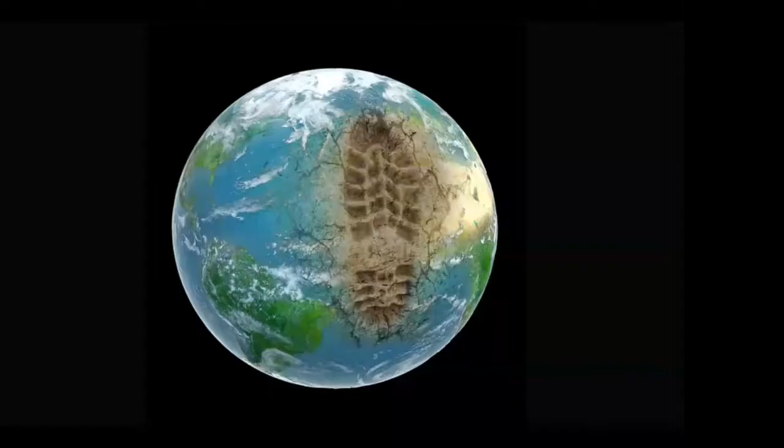I like to start off, since I'm talking to 90% students, about how I even got here. My study was really in water resources. I started at the University of Colorado Boulder and literally got a degree in water. It was very innovative at the time. We did basically everything in policy, hydrology, and social justice issues.

It really pointed a lot to our footprint on this planet growing more and more intrusive, impacting not just the lives of each other, but negatively impacting all the ecological systems around us. So I got very depressed, but I was hoping there would be a solution I could latch onto and move forward with in my career.

In my final semester, I got that opportunity. I started learning about the concepts of bio and phytoremediation. Raise your hand if you've heard of those two concepts—okay, about half the room. Basically, bio means life and phyto means plant, and remediation stems from the word remedy, like taking a remedy to heal yourself. So it's life and plants remedying, in a sense, the planet.

At Boulder, our next door neighbor was Rocky Flats, which at the time was producing radioactive rods for a variety of weapons and nuclear power facilities. Throughout that period, they had really high uranium levels that were radioactive in parts of the area. I started reading papers about researchers out there planting sunflowers, and these plants were doing phytoremediation—they were actually breaking down the higher state of uranium and making that radioactive material benign.

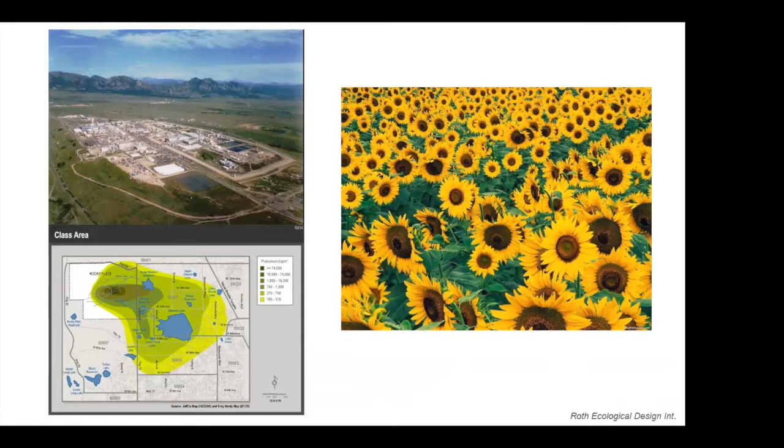This led me to a man named Dr. John Todd, based out of the Northeast in Vermont. He was definitely an ecopreneur, with a bunch of different patents on a variety of ecological technologies. One of his most famous was what was called the living machine.

This took those concepts of bio and phytoremediation and put them in an aquatic format—basically wetlands in a box—able to treat a whole variety of polluted water. This is actually the wastewater treatment plant facility in Burlington, Vermont, for example.

So instead of it being this stinky, odorous place you may never want to visit, this was actually a place where people would come and have lunch, pick flowers, take them to the farmers market. It was really a paradigm shift for me.

I had the opportunity to serve as his apprentice for about 6 months, and then onwards I worked for him and got shipped to Hawaii to deliver the technology to the state in 2000, under our late Senator Inouye. He earmarked a project, at the time through the biotechnology program at PICHTR, to bring the technology to the state and see if it could work in Hawaii, utilizing Hawaii's native plants, Polynesian introductory plants, and tropical plants.

So we ran a research facility—actually in a really glamorous spot, at a slaughterhouse out in Ewa Beach. You can imagine there was basically a big unlined pond where a lot of polluted water with a lot of nutrients was going into the groundwater, so it wasn't obviously a good thing.

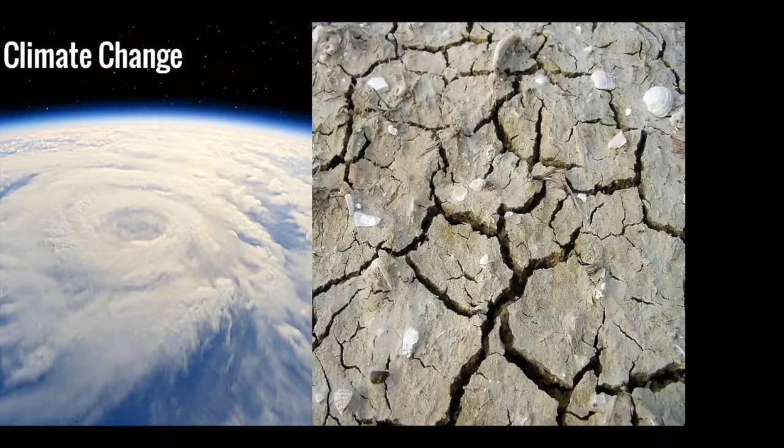So to start on the topic of thinking about the future and our water strategies, we cannot not think about climate change. In the news today, we've heard more and more about these hurricanes and growing storms. But on the other flip side, we're also dealing with increasing issues of drought, not just here in Hawaii, but globally. And with the storms, obviously we remember Irma.

Folks on the East Coast are still dealing with it. It was being claimed as the strongest hurricane ever. With climate change and the warming of the oceans, this is how these storms can get larger than usual. And of course, Maria just hit last night - 915 millibars this morning, the lowest millibars recorded ever, with Maria.

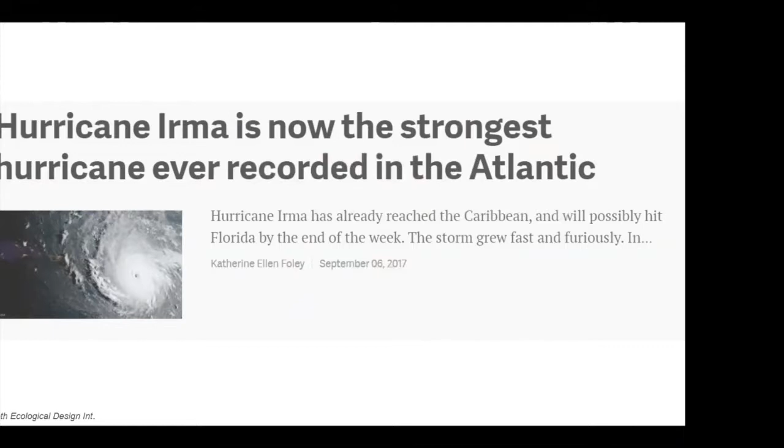We're obviously living in a world where these things are becoming more regular, becoming larger. And let's not forget Harvey. I pulled up some statistics from Harvey, because it's actually a really interesting case - these are types of cities that don't usually see this, an unusual event of a hurricane or large storm coming in. Granted, they are becoming bigger and a little more ferocious, but the question becomes: was Houston prepared? Did Houston think about its development over the last 20 years, knowing they're going to get hurricanes, to be really prepared for when Harvey came?

So we're going to run through it really quick, but just some statistics. 51 inches falling, that's 11 trillion gallons of water hitting the city. You can see 56,000 911 calls, and about 450,000 residents asking FEMA for assistance. One of the main issues here was that FEMA had drawn the lines for folks to have flood insurance, but many of the folks were actually outside of the FEMA flood insurance lines, meaning they didn't have any flood insurance.

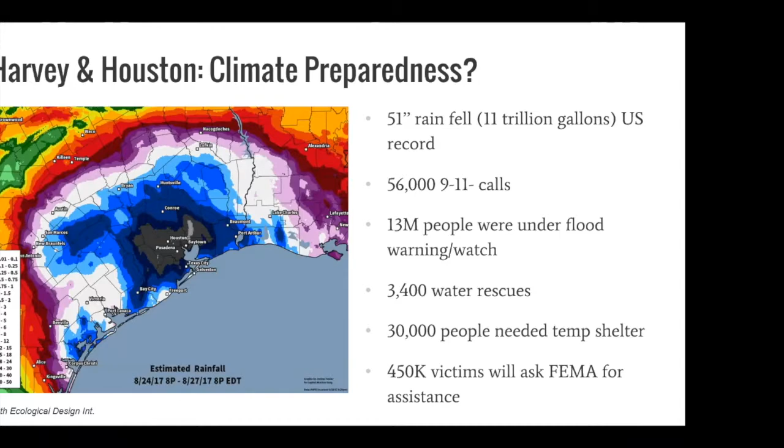This is definitely a huge deal because FEMA on average doesn't give any more than about $5,000 to $30,000 per resident. So this is, in my opinion, something the city should have maybe thought about before these kinds of storms hit.

Raise your hand if you think removing wetlands is a good idea. All right, so for everyone online, no one thinks that's a good idea. Raise your hand if you know about the Clean Water Act and the Wetlands Act, for example. Well, technically it's also illegal to remove wetlands.

Through the Clean Water Act and the Wetlands Act that came out of the 1970s, people really understood that wetlands were really important as an ecological service. They can store water, they can't prevent flooding, but they can hold more water than concrete can, right?

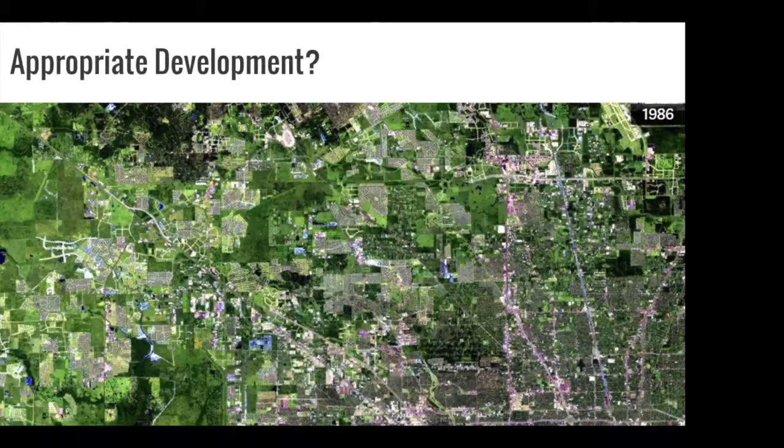So then we move to the year—oh, it's 2017, sorry—and you can see the big difference in impervious surfaces. So with 70% of the wetlands gone, they went out and sprawled the area.

And then, you know, this should just be obvious, but impervious surfaces plus the high groundwater and the storms is going to equal flooding. Has anyone ever seen, besides putting in pavers, concrete let water go through your driveway or sidewalk? No, it runs off, it runs down the road, right?

So although you cannot say that keeping all those green spaces wouldn't have caused an issue, it certainly would have reduced the amount of flooding damage that was caused. So in my opinion, Houston, no, they weren't ready and they weren't planning for these kinds of storms. And in many ways, can the city even be held negligent is a big question.

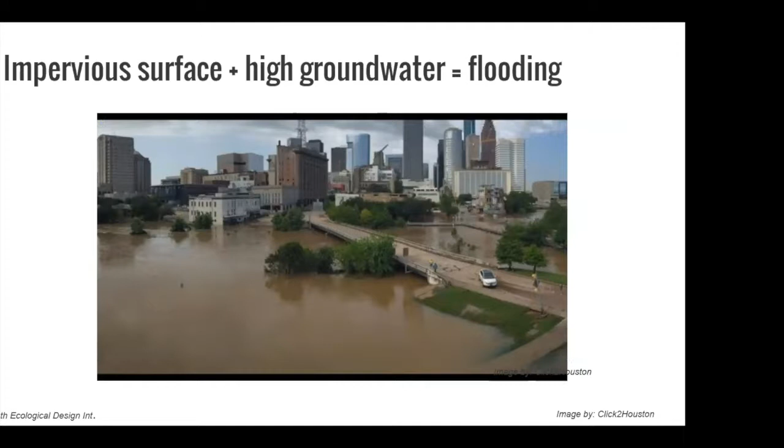But these are the kinds of issues that I think we as Hawaii need to think about when we start planning and developing our cities, because the reality is there's more people and there's going to be more development, but how can we be smarter about it?

So this is just an example to show that Hawaii still has the potential of getting one of these storms one day soon. Fortunately, we haven't had a really bad one since Iniki, and that was in 1992.

But you can see the track record of the different types of tropical storms, depressions, and hurricanes we've had, and we've been generally pretty lucky. Mostly we're thankful to the Big Island, which tends to divert storms away from us. But at the end of the day, it's not an if question, it is a when question, right?

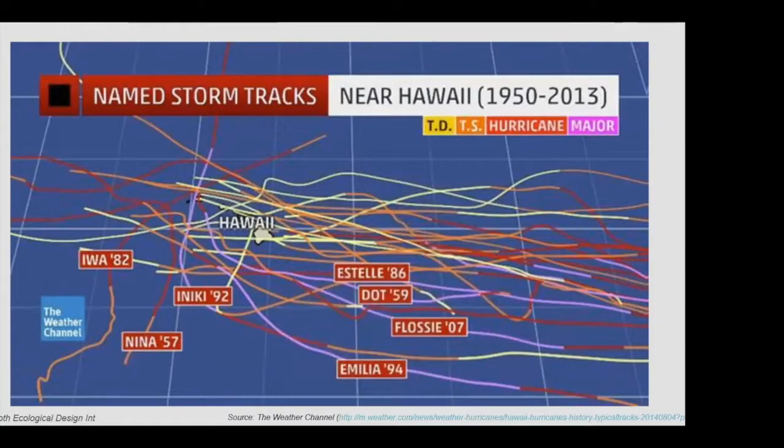And it wasn't that long ago that Darby hit, right? So this is just an image of what comes down the valley after some of these major storm events. We look at the city and we have a lot of flooding in the streets.

Here, this was an image of Waimea Bay afterwards. Obviously a huge amount of sediment coming down, and this also has water quality issues, of course, for our coral reefs and so forth.

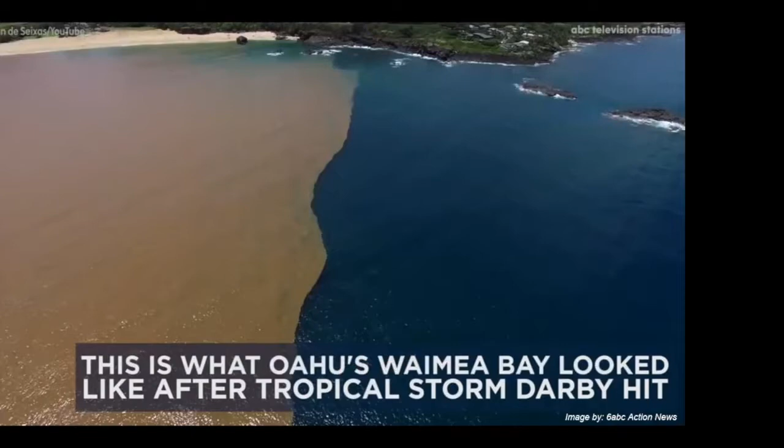But beyond just the big storms, in terms of hurricanes and tropical depressions and so forth, just our regular rain events are changing. This is actually a paper co-authored by my old office mate, Marcy Grabowski, over here when I was at SOEST. But basically this study found that the 20-year storm is actually becoming more frequent in an area.

This is over in Kona. But generally speaking, we're starting to see these heavier downpours, all of our rain maybe in one month coming down in a couple of events, instead of being that light trade wind pattern. So this is important too when we think about our planning and design.

Another big issue we have to consider is sea level rise, which is happening. This image, given to me by Chip Fletcher, shows the Ala Wai during a very high tide event, or king tide. You can see the water actually coming up through the storm drain, which usually moves water off the street into the canal. So if we had a king tide and then a heavy downpour, what do you think might happen here? This issue is certainly not going away.

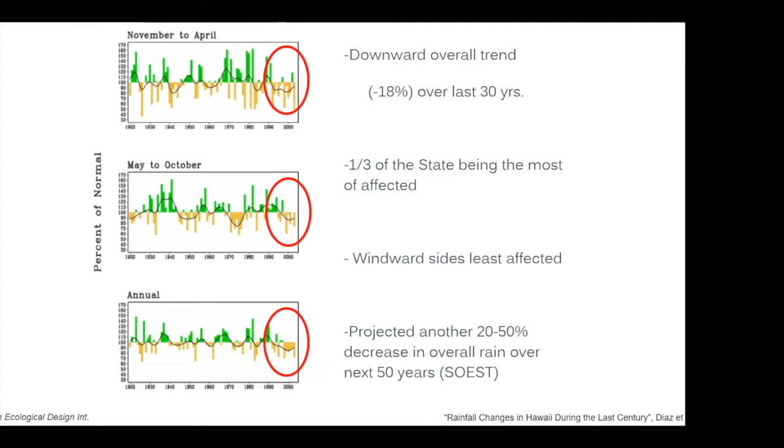On the total flip side of having too much water, we also have to deal with not having enough. Drought, unfortunately, is trending in Hawaii over the last 30 years or so. We've had a downward trend of rain, about 18%, according to UH scientists. And if you look at different projection models produced by SOEST, they show we might have as much as 50% total rain reduction in some of our leeward areas over the next 50 years.

On the flip side, with less water getting into our aquifers, we also have to think about the growing population. Right now, the spread of water usage in the state, according to the Hawaii Water Conservation Plan from 2013, shows about 60% of our total water is going to agriculture, and basically the rest is going to water usage in our cities. It's also important to note we could be looking at doubling the state's population over the next 60 to 100 years. So we really need to think about our water demands, where the water is going in these sectors, as we begin strategic water planning in the future.

This is the reality as it is right now, from the State of Hawaii Commission on Water Resource Management. This shows the different areas where we have groundwater supplies in the state. Not surprisingly, in areas with high population, shown here in red, we're basically pumping out the same volume of water that's going in—that's called sustainable yield, which isn't necessarily where you want to be. You want to be more in the green, where you have more supply, pumping out less than what's going in. So areas with higher population or drier conditions and high water use tend to pump out more than what's going in.

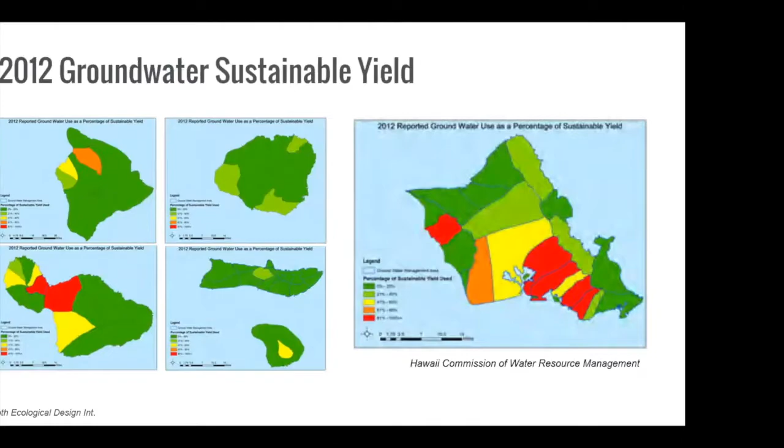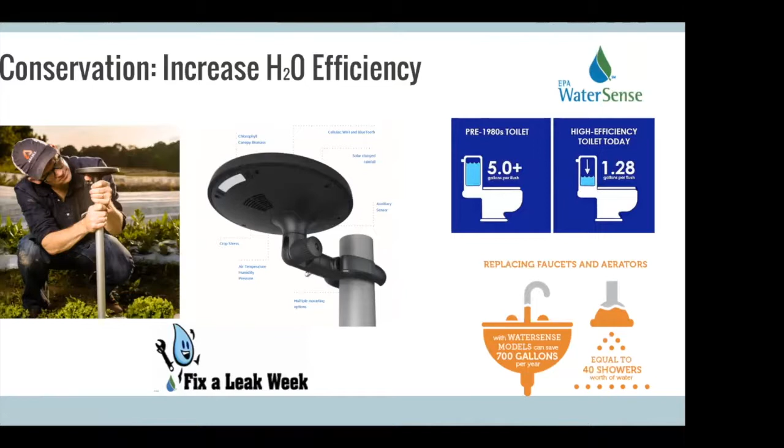It looks at the chlorophyll, the soil, and the plant health, and it'll irrigate just enough based off of satellite imaging, as well as through a company called Arable that creates these computer technologies to monitor plants. Interestingly, they're inexpensive. This one is about $1,000 and can cover about 1,000 acres, so it's an inexpensive way for a farmer to get on board.

Then the other two are recharge and reuse. The goal is increasing about 30 million gallons a day of stormwater getting into the ground instead of running off, and this would happen in more critical areas, especially where we have groundwater supplies we want to focus on. Then you have reuse, which is the recycled water we talked about at the beginning—doubling the volume of wastewater treatment used to produce recycled water to replace potable water needs by the year 2030.

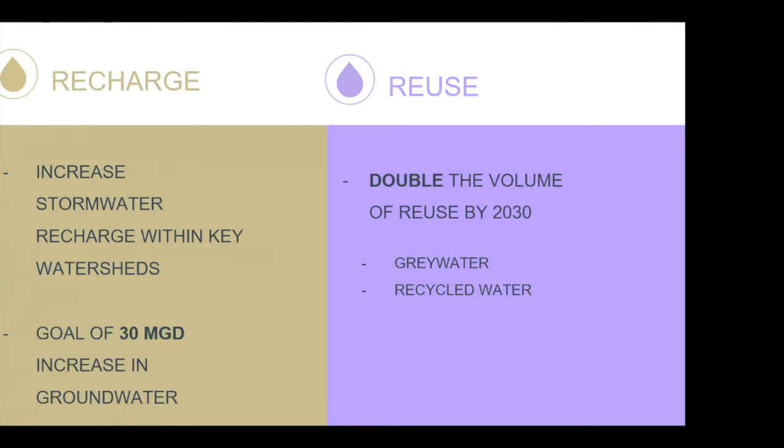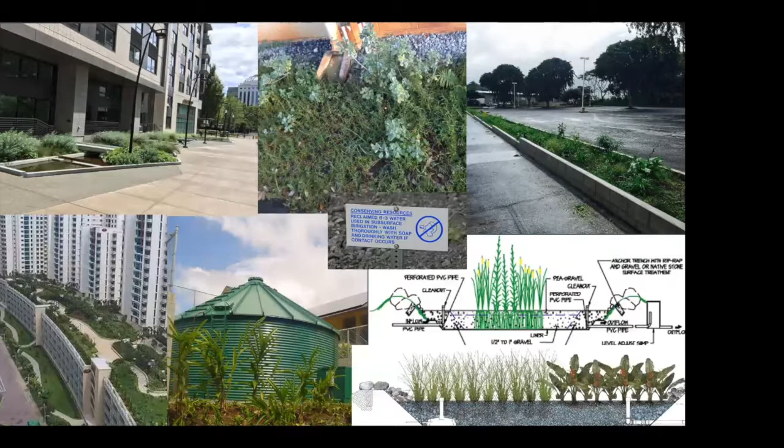In the built space there's a whole variety of approaches for how these can be brought in. Landscape features don't just have to be pretty things, they can be functional too. For example, this is a rainwater garden, again a project in Portland. On the far right-hand side, Windward Mall, that's what's called a bioretention—it takes all that stormwater from the parking lot and runs it through that sliver of terraced garden. Of course you have green roofs, and even rainwater catchment incorporates with green infrastructure, because really the whole concept is how do we mimic the natural cycles of water and nutrient management and put those ecological services into our communities.

So just to jump a little deeper into recharge, I'm going to throw out some things to make sure we're all on the same page. What do you guys think stormwater is? How is it defined? It's runoff after a rain event—basically once that raindrop comes down and hits a surface like a roof or a parking lot, that becomes stormwater. So it's no longer rainwater, it's now stormwater.

So then what is stormwater runoff? Any of that water that runs off of an impervious surface. At a certain point it doesn't even have to be an impervious surface—you can still get stormwater runoff in a green space, but in those green spaces there'll be a certain point of absorption where it cannot hold any more water in the soil or in that planted area, and that also can become runoff.

So why do we care? Let's think about what's in stormwater. This is actually from 2006, so I don't know the updated number, but if we talk about 95 streams being technically impaired in the state of Hawaii, that's a pretty big number. Every time stormwater runoff gets generated and isn't recharged as quickly as possible, it keeps gathering with its friends—you suddenly get a lot of water coming down a street, picking up all kinds of material, and all that material gets dumped into our streams first, and then ultimately into the ocean.

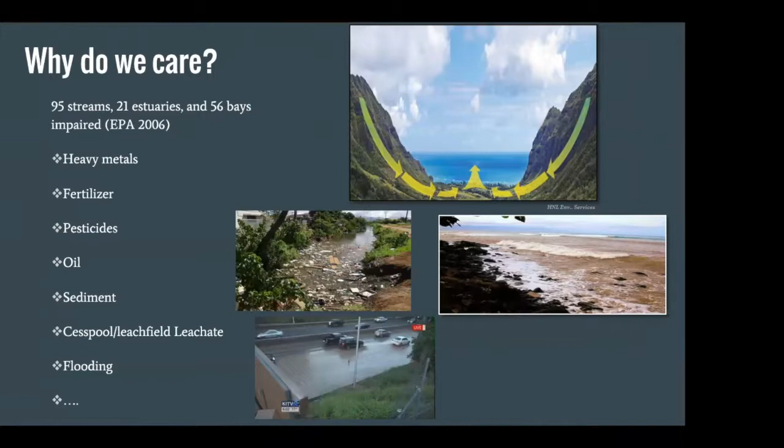So when we think about how we're going to do green infrastructure and how we want to think about design, the number one thing we first got to understand is rainfall, right? We have to understand, when you start looking into a site and thinking about how are we going to try to slow down that water and recharge it, we need to figure out how much water are we talking about.

Hawaii is one of these special places where we have probably the most diverse amount of rain per square mile in the country. But there's a lot of great resources for figuring out how much rain you have in any given space. One of my favorites was actually made by the University of Hawaii Department of Geography.

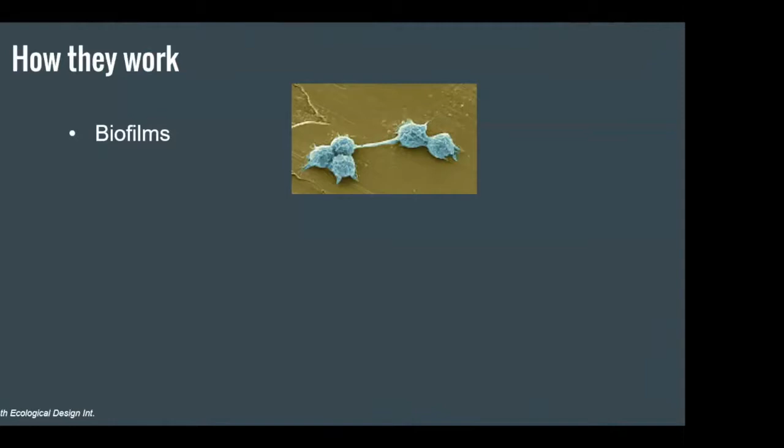I'm sure most folks have a bit of food web knowledge—it starts with the microbes. The microbes form biofilms and do a lot of digestion of sometimes the longer chain organic molecules. They need a place to attach, so the plant roots provide that habitat. The plant roots have a lot of surface area, similar to our intestines—if you were to roll out all of our intestines, it'd be miles and miles of surface area. It's sort of the same concept with the plant roots.

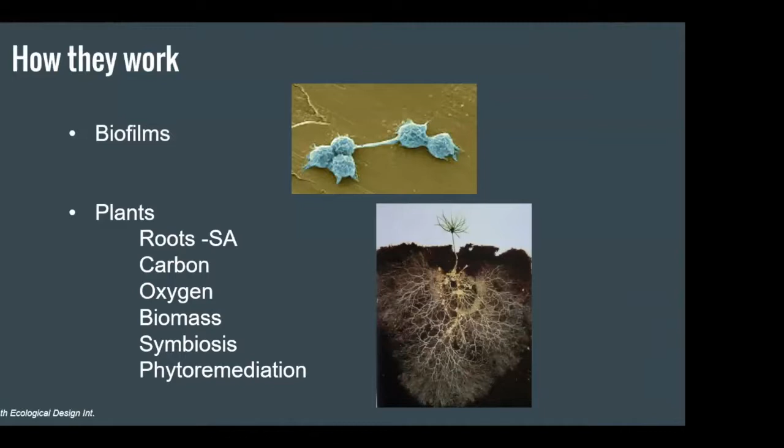The roots produce all these other functions that support those biofilms and microbial growth, and they take out maybe 5% of the nutrients or pollutants, but it's really providing the condominium complex for these biofilm communities. Depending on what the waste strength is coming in, you just need a certain period of time for it to sit and have retention time through the treatment system.

So just some examples of local projects. The new UH campus out in West Hawaii, called the Palamanui campus, is a LEED Platinum facility. This is actually during construction, so I unfortunately don't have a picture yet of how it looks today, but you can see you don't see the water on the surface—this will eventually just look like a garden. It's treating the water to secondary standards, and all the water will then be recycled and used on campus for irrigation.

Another one down the road was for Kaiser Permanente in Kona. Again, this is a wastewater treatment plant, but you wouldn't normally think of it—it's also growing heliconias and other things, where the operator comes out and cuts the flowers and leaves them out for the hospital staff.

So in summary, I'm going to pull all these things together, because this is really where I want to touch on how we bring all these little pieces together and start thinking about the future of our cities. And that's this idea of distributed infrastructure and water resiliency.

Right now we have all of our eggs in just one or two baskets in terms of our water supply, which doesn't give us much water security. If we think about how the renewable energy industry has been operating over the last decade, they've been moving more and more to distributed systems. We have folks with their own solar panels, we have solar farms, and we have less reliance in general on the grid. Following that same model, there are new communities being built on the mainland that demonstrate this.

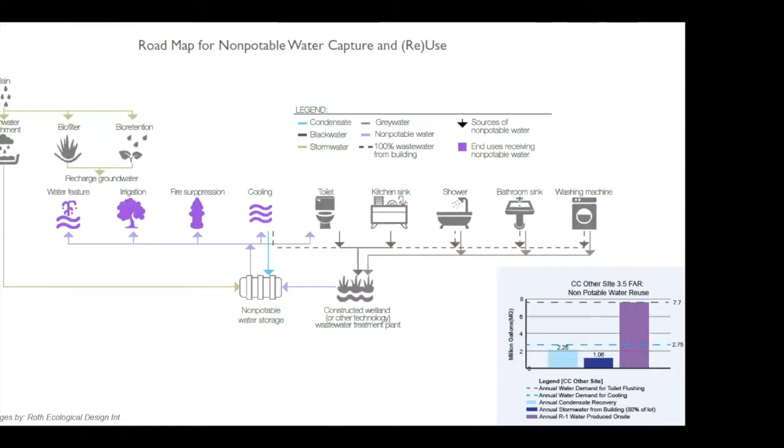So I'll lead with this: really where we need to go is we're moving forward with policies, but we also really need leadership, because all of you are going to be part of it. I heard on the radio, on a different topic but relevant, something like—if we can't start planning for the hard things now, they're going to happen and it'll be chaotic. I might not be exact with that quote, but if you think about it, if you can't start planning the hard things now, when it does happen, it'll be chaotic.

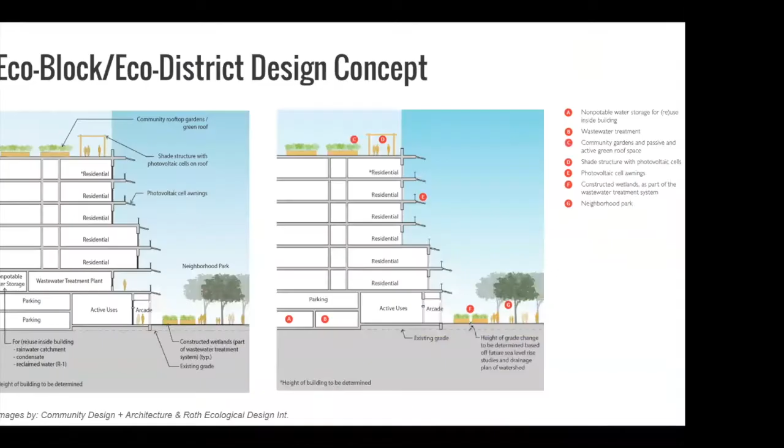Yeah, okay, maybe I should back up a second. So if you go to a website from NOAA, you'll see that there are durations of how long the rain lasts. So essentially you can have a 10-year 2-hour storm or a 10-year 24-hour storm, and those are going to have different volumes associated with it, right?

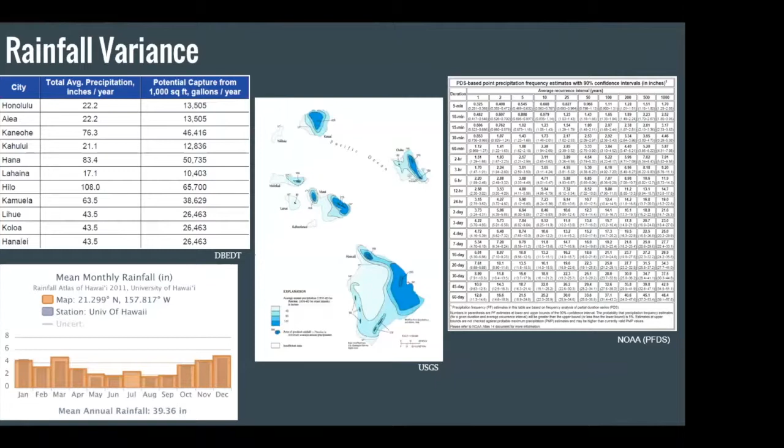When we talk about low impact development, the rules with the city, for example, require that you design your systems for a 1-inch 24-hour storm event. The reason I bring this slide up is because it really changes a lot depending on where you're at, whether or not you're really going to hit the water quality volume in a 1-inch 24-hour storm.

But they take kind of the general national average, and I guess for Hawaii that would cover the 90th percentile storm event. Does that make sense? Yeah. Okay, sorry, I wasn't clear.

This is a great segue into my question about reservoirs. Hawaii has a long history with reservoirs and aqueducts, maybe a not so good history in the more recent past. But it obviously plays into this idea of retention and recharge and sustainable yield. I'm curious what your thoughts are on that. What's the future, knowing what we know about climate change? Should we be thinking about getting our reservoirs up and running again? I heard Nu'uanu is at like 5%.

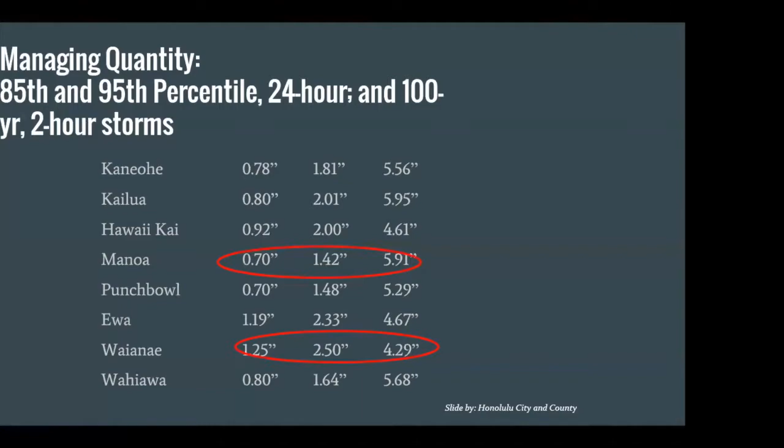Water is underpriced and it's not price elastic, but conservation of water could lead to savings on the energy side. So if you could capitalize that—let's say you save 10 million gallons a day through conservation, you'd have to change the pricing a little bit—you could generate in effect $4.5 million a year, which could be used to pay off a bond, which could be used to help finance infrastructure.

I'm going to add that to our final presentation to the city. So what Bill is saying is, if we end up saving something on the order of—I don't have these in annual, but let's say if it was 27,000 gallons a day, that's easily going to be, I don't know how many million a year—but that could also get added into an indirect cost savings.

One thing in convincing people about the cost is the cost of not doing something. We tend to think it's zero, but in fact the cost over time of not making the change aggregates. When you actually present the alternative, you start to see the cost of not doing something is worse than making the changes—especially if you have to go back and retrofit later, which we all know isn't easy.